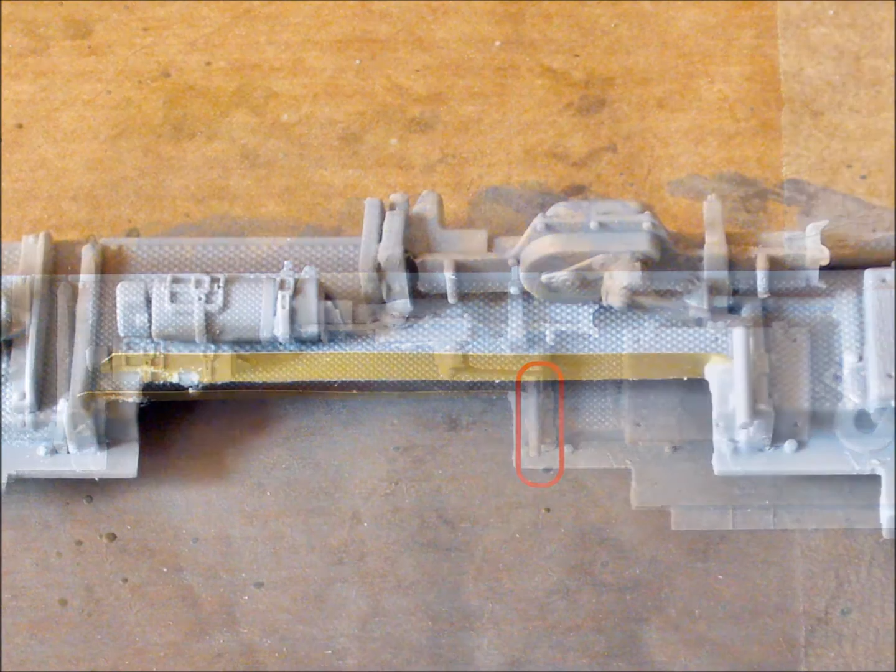Here you can see the cutaway to accommodate the air intake. And you can see that long PE part that'll be almost invisible later.

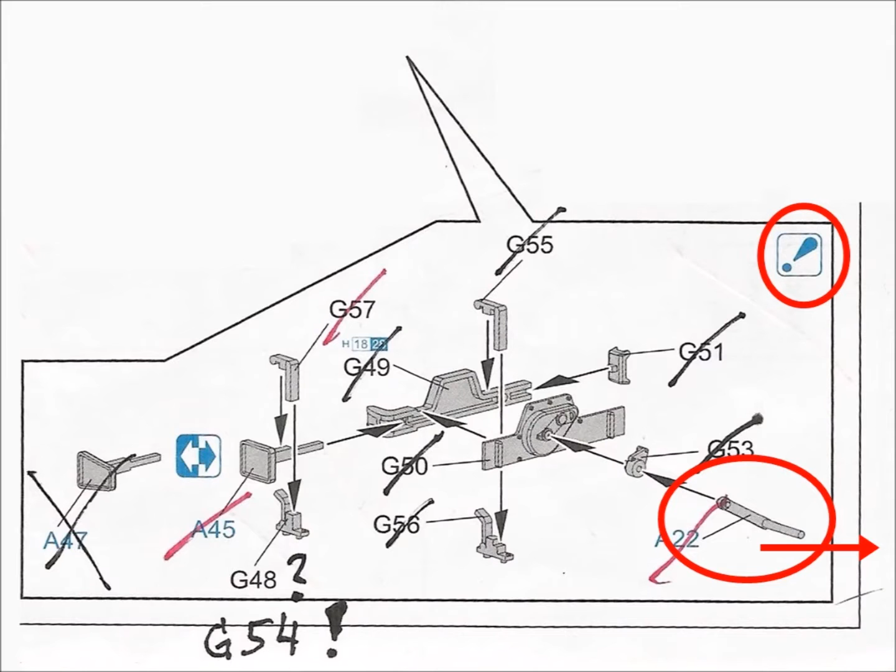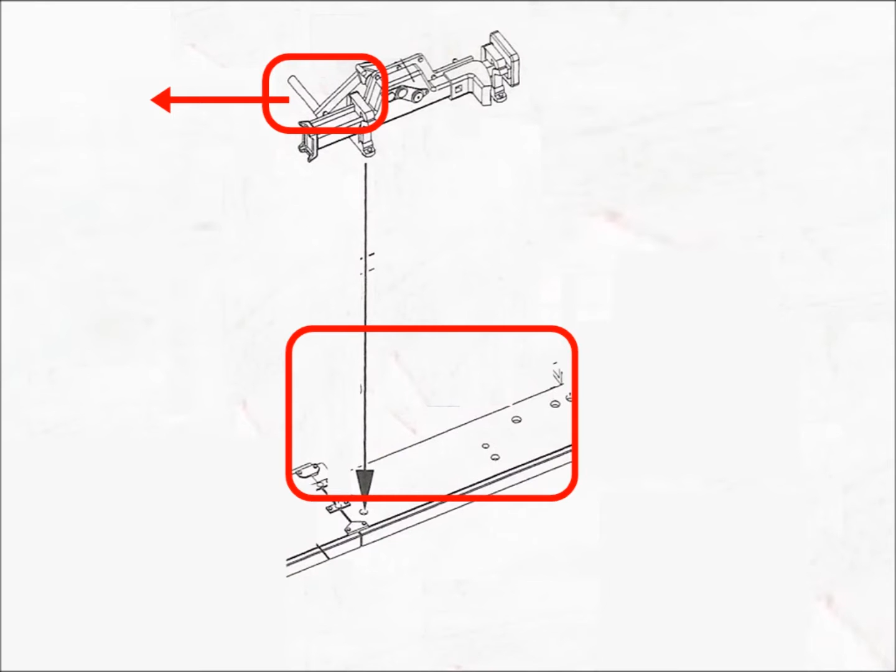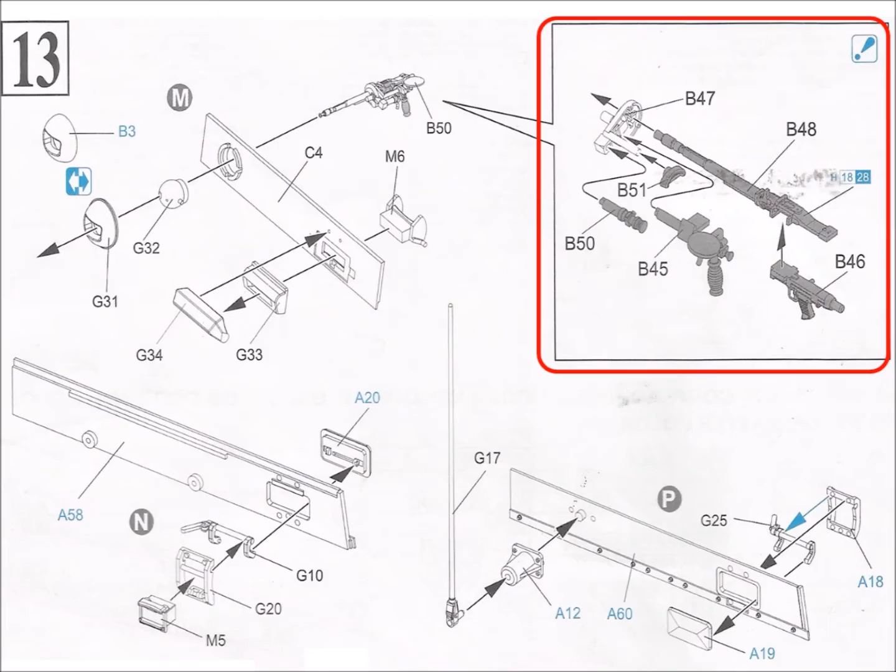The ball MG comes in 6 parts plus ball and mantlet, 8 parts altogether. I like detail, but these are too many parts. 3 parts less would have been possible if the MG itself had been 1 part, as well as the ball and mantlet, as well as parts number B47 and B51. It wasn't really fiddly, just too many parts in my opinion. The result looks great though.

Here we have most parts for the center portion of the upper hull. I attached the handle onto the part on the bottom for just one reason: to show you that it'll be invisible when the main parts are glued together. There you go, it simply can't be seen.

But it's getting even worse. Here you see the ball MG, and again with the top plate in place. All that's visible now will disappear when the turret is mounted. The gun blocks the view on the last visible bit.

Back to the part count. 2 parts would have been enough for building the ball MG: ball and mantlet plus the MG barrel. I find this most annoying. I could have spent 30 minutes on some important things instead of cleaning up and gluing hidden parts.

I don't know why, but I didn't like the kit's antenna at all. I had a feeling that the diameter is wrong, it simply looked too thick. So I made an antenna from a piece of steel string for guitar. Panzer 36 was in Bovington the same day. He took pics of the antenna of a Panzer III and confirmed my impression. The antenna I made should look alright on the tank.

Here are a couple of pics of lower and upper hull buttoned up. No fit issues at all. A real nice build.

Next thing to do was adding the extra armor. I only used the PE part for the top plate here. The plastic parts were nicely detailed and there was no reason to replace them with PE parts.

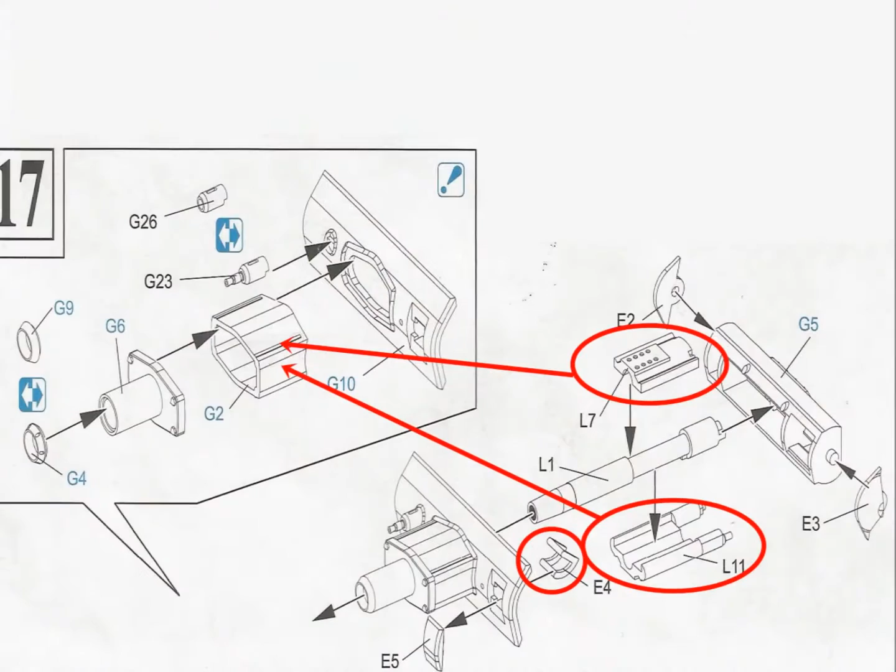5 more parts for the spare parts box in a closed cupola. The marked parts will be hidden after the gun is finished. 3 beautifully molded parts nobody really needs, only to make the other parts fit together.

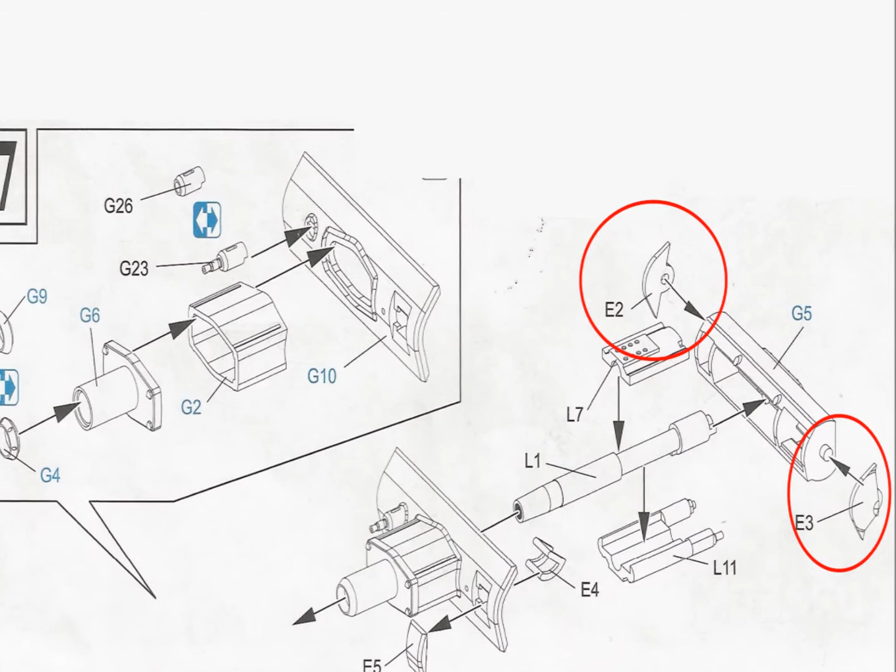Here we have another problem with the instructions. The hinges E2 and E3 shall not be glued to G5. If you glue them, the barrel can't elevate. A tiny bit of information Dragon was not willing to share with us. I was lucky because I kinda knew it. This is not my first tank kit and I felt that these parts should be workable.

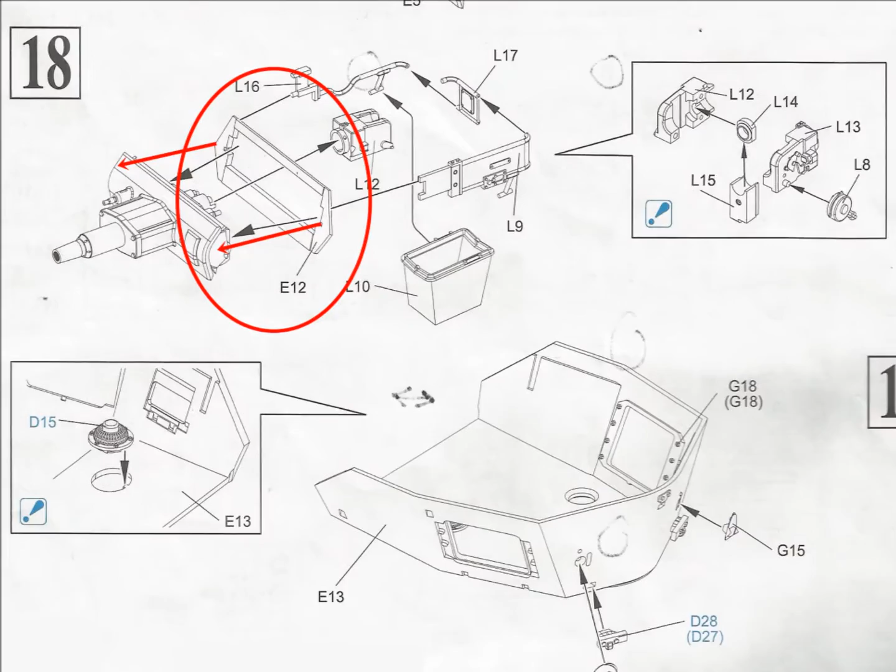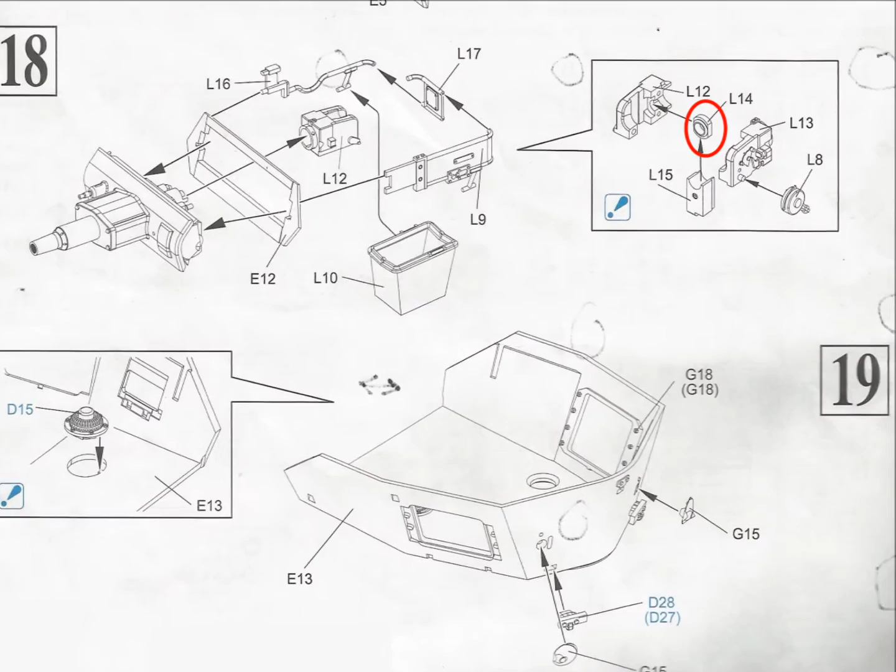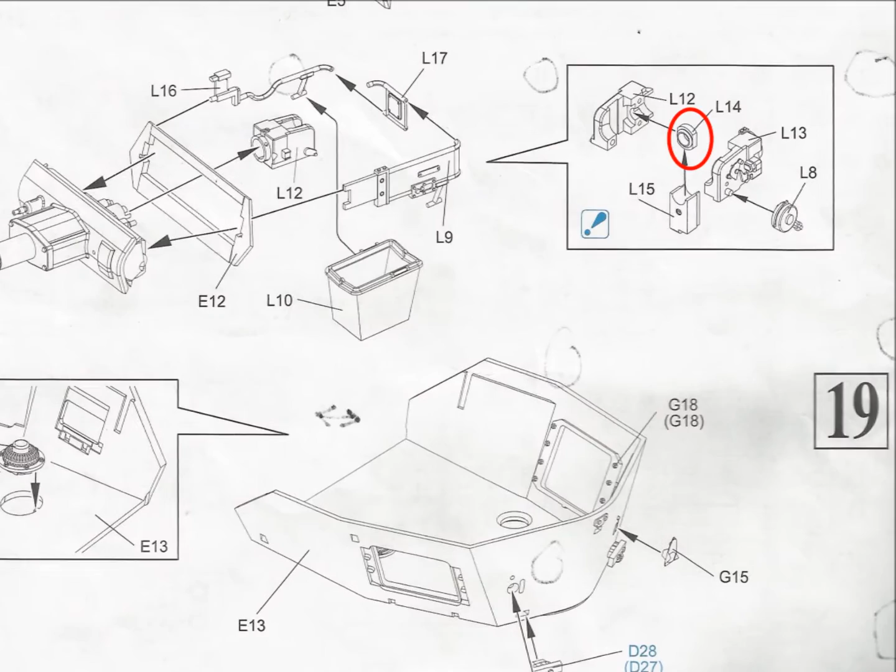Here you can see that part E12 shall be glued to E2 and E3. I added red arrows to emphasize it. If you glue the parts that way and you didn't glue the hinges to G5, the gun will be able to elevate. Part L14 won't be visible whether you leave the gun lock open or closed. This is another example of over-engineering, not really bad, but the kit could do without that part. The instructions are not really precise, because you might think you'd have to glue part L15 underneath L14. L15 is actually positioned in front of L14.

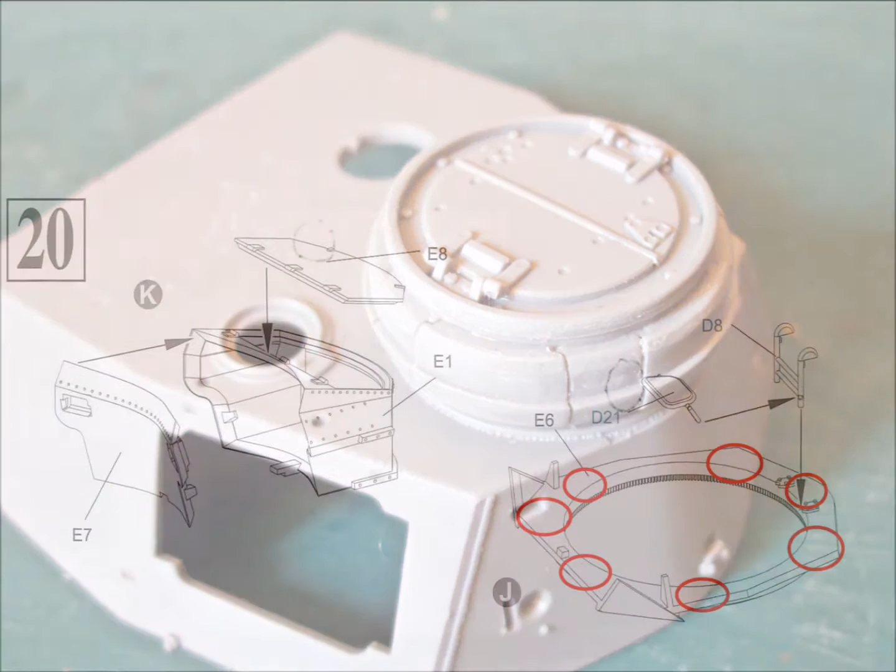Part E6 has 7 large ejector pin marks that need to be removed if you want to show the turret's interior. Yes, even Dragon kits have parts like this.

Fiddly parts day. I dropped this tiny part 3 times but I defeated the carpet monster. Here you can see where that tiny part sits. And I added wiring for the smoke grenade launchers.

Next evidence of over-engineering: the turret lifting hooks come in 2 parts. 1 part would have been good enough. I dropped all those parts several times but I defeated the carpet monster again and again.